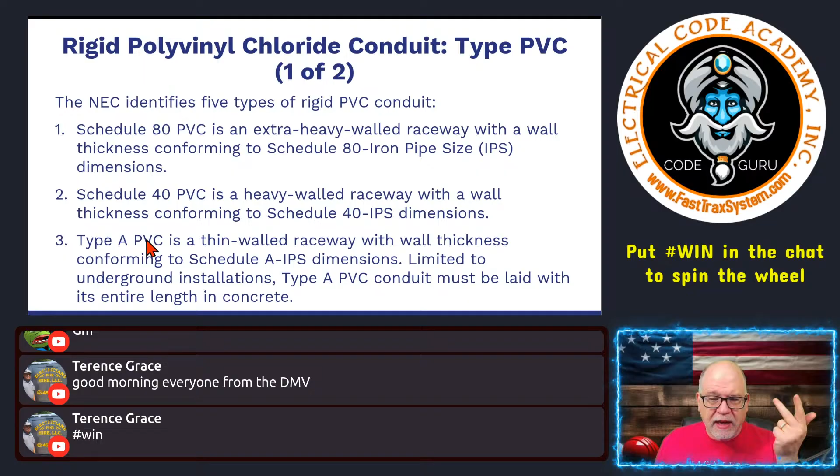So again, this recap. You have a schedule 80, more robust in areas where you're worried about damage. You have a schedule 40, probably the workhorse you use most all the time when you're using PVC. Then you have a type A, which is a thin-walled version that's really designed to go into the ground and encase in concrete. Then you have what's called type EB PVC.

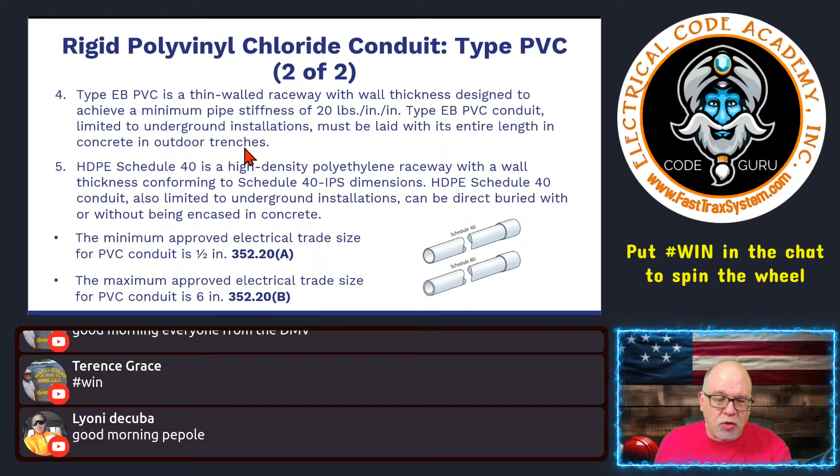That's a thin-walled raceway with a wall thickness designed to achieve a minimum pipe stiffness of 20 pounds. Type EB PVC conduit is limited to underground installations, must be laid with its entire length in concrete in outdoor trenches. Okay.

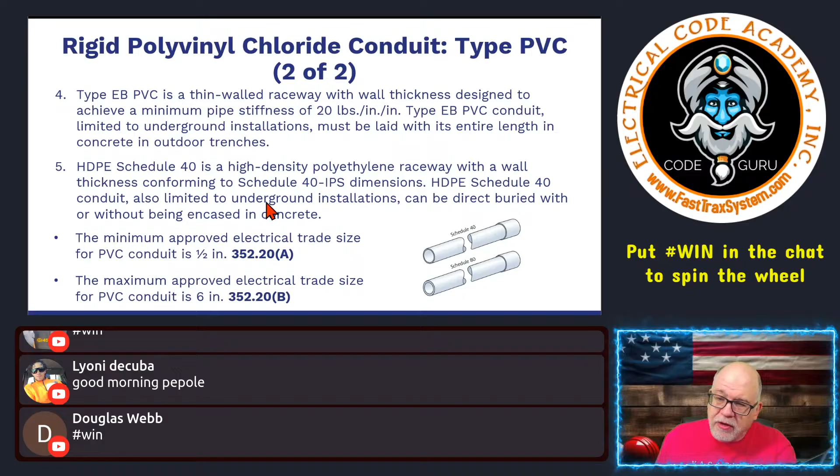Also, lastly, there is an HDPE high density polyethylene Schedule 40. It's a high density polyethylene raceway with a wall thickness conforming to Schedule 40 dimensions. HDPE Schedule 40 conduit, also limited to underground installations, can be direct buried with or without being encased in concrete. So HDPE is some tough stuff.

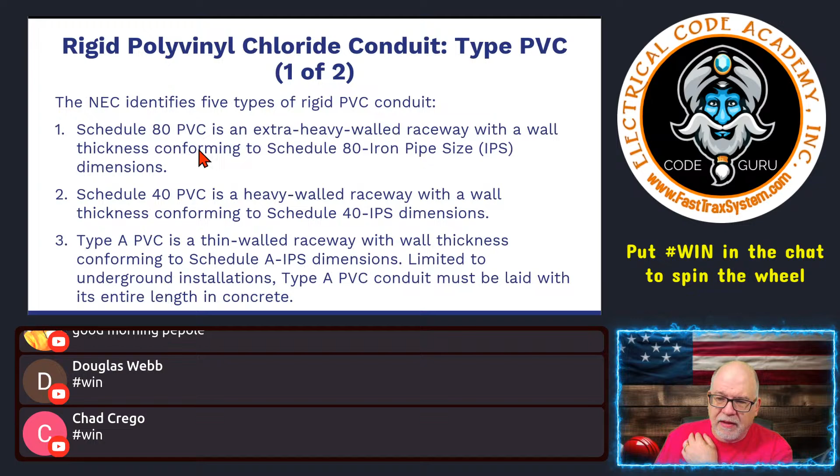So it's still Schedule 40 thicknesses, meets all those rules, IPS dimensions, but it can be installed with or without concrete encasement. But it is limited to underground applications, and it is HDPE. So above ground and below ground, Schedule 40, Schedule 80. The other types that are available, for below grade underground applications, EB has got to be encased in concrete, and so does Type A. Its entire length encased in concrete, but it can be underground.

And then, of course, you have HDPE, high density polyethylene type. And again, don't get confused and buy that when the supply house says, hey, all I've got is some HDPE Schedule 40, it's okay. No. It's limited to underground installations and direct burial, but you don't have to encase it. Right. That type of thing.

All right. Now, as far as the National Electrical Code, when it comes to the sizes of this stuff that's available on the market, we have seen a change, and I'll show you. But the minimum size that you're going to find for this is a half trade size. We call it half inch, but it's actually half trade size. And then the largest type of PVC that you're going to find is going to be trade size 6. Okay. And if you look at it, I'm going to show you.

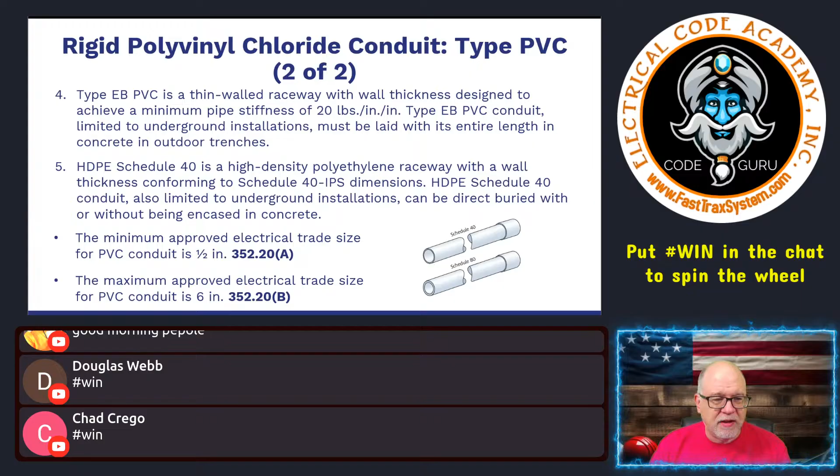Hold on here. Let me go over here in the code real quick. Let's see. That might have been last code cycle. I don't see anything else in there. So we'll just stick here. So it's as small as a half, as large as 6. And I would think the majority of the 6 size of PVC is probably where people would use it, running it out underground for various duct bank applications and things like that. Obviously, I'd rather run PVC than anything else, I'm just saying, in that scenario. Okay.

All right, securing PVC rigid. So, okay, you kind of look at here. This might be hard to see, okay? And we'll go look at the securing in .30. It's another tip for everybody when it comes to securing and supporting applications. Remember, in most of the wiring methods, .30 is the go-to location when it comes to securing and supporting applications, right? And obviously, something that's secured is considered supported.

So, thinking about where do I go to find this, especially if you're on an exam and you get an exam question and it seems like it's talking very specifically about the wiring method, PVC, but then something about that question pops in there about securing or supporting applications, then it shouldn't throw you. Obviously you're going to go to 352 and you could bold scan, but remember securing and supporting applications, it's the same way in 334 for nonmetallic sheathed cable, .30, same scenario. Securing requirements, same thing in rigid metal, intermediate metal, rigid, all of it.

The .30 is one of those that you don't have to remember everything about it. But if you can remember the article that you need to be in and it's a wiring method, then .30 is going to put you in the right place for securing and supporting. So if I'm on an exam, I'm not going to go whipping through the back of the index looking for securing and supporting requirements for PVC, for example. I'm going to know that it's a raceway, it's a wiring method, it's in chapter 3, it's 352, and the securing and supporting requirements are .30.

If you want to put in more securement, or you feel like it looks better, the one thing I will tell you about PVC is that, depending on the location, if it's a lot of heat or it's in the sun, you have to take expansion and contraction into play and use expansion fittings where necessary, because it can move, it can deflect. You want to make sure that the securing method allows for it to be able to move, not hold it so tight that it can't expand and contract, because it's plastic.

It heats up, expands, cools, contracts, and you got to account for that so you don't have that spaghetti along your wall, right? But any other application where you might install it inside, you're not going to have that kind of issue. But if you want to put more securements up, that's totally up to you. Don't let anybody tell you otherwise. You tell them Uncle Paul said piss off.

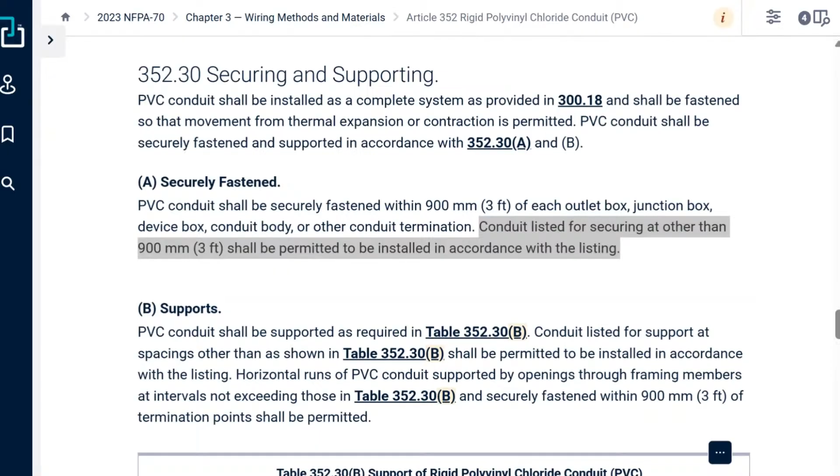Okay, and we're not talking about termination into a coupling. Okay, so it says conduits listed for securing at other than 3 feet shall be permitted if installed in accordance with the listing. So if you have a manufacturer, for example, that has their own instructions, their own guidelines, depending on what the manufacturer is, then obviously it has a listing for that, and you can follow the listing. But this is a minimum rule, right?

1 hole versus 2 hole strap doesn't matter. It's a preference. There's a lot of people that love 1 holes and a lot of people that love 2 holes. A lot of times, depending on the size of the conduit, it's going to dictate the 2. So 1 holes may be limited in certain sizes, where once you get to a certain size, it'll be 2 hole, those type of things. But again, it really doesn't matter. As long as it secures it and fastens it in place, you're good.

You're good to go. I have personally not seen a whole lot of 6-inch 1 holes, but they might be out there. I don't know. It doesn't really matter, as long as that strap is listed to go with that type of raceway. And again, if they make a 6-inch 1 hole strap for use with PVC, then obviously it's okay. You can do it. I don't guess there's a problem with that, but we'll see. We'll look more into the code.

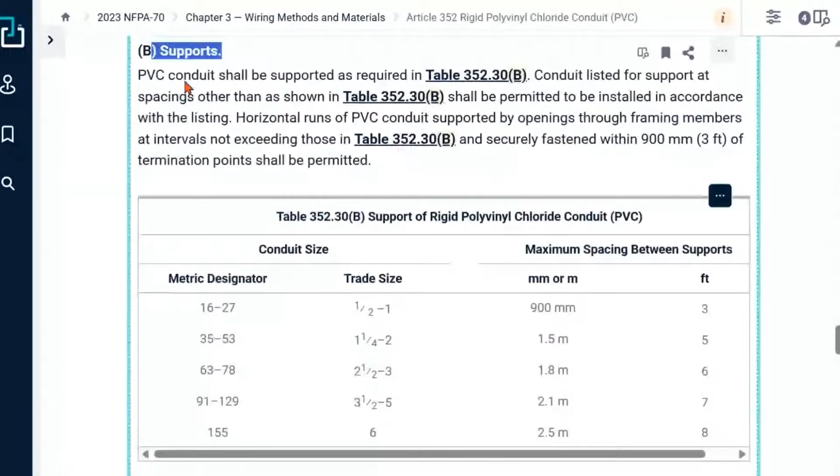All right. So that's your secure. Again, that's the general rule, right? Within 3 feet. Can it be less than 3 feet? Yeah, if you want. That's up to you, your design. Now, when it comes to supporting, this fastening is the requirement to be securely fastened within 3 feet. Then you get into supporting, okay? And the supporting, as it goes along the span of the wiring method or the raceway, will be securely fastening it in place, but it's also doing the supporting role, okay?

So it says PVC conduit shall be supported as required in table 352.30B. Okay, that's this table right here we'll look at. It says conduit listed for support at spacing other than shown in this table shall be permitted. So it's a permissive statement to not follow this table, to be installed in accordance with its listing. So again, these are general rules. You could have a manufacturer that states otherwise.

And some people say, well, what if the manufacturer says differently? Well, this is the minimum code requirement. A manufacturer could come up and say, I want you to do it at more intervals than what this is, that type of scenario, right? So remember, this is a permissive rule. It is permitted to install it in accordance with the manufacturer's listing. Okay, we just don't want to lessen the safety aspect of the code.

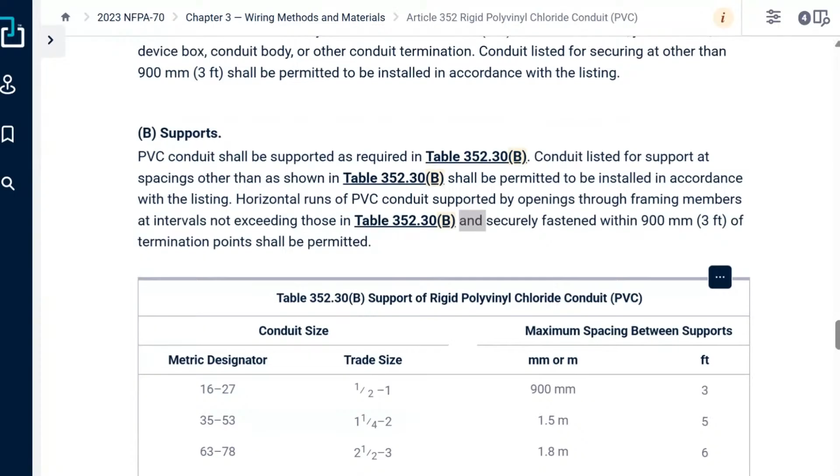If your studs are spaced, and they probably will be, 16 on center or 24 max, then as long as it's horizontally running through those framing members, and it is still securely fastened within 3 feet of the termination point, it shall be permitted. Okay, so notice this and in here. Ands are important. Why are ands important? Because in the code we run into a lot of things that say this and that, or this or that.

And so it's real important to understand what the ands are or, because you could have something that says one thing or it says something else, then you got to do this and that. Whereas if I have an or, it breaks up the requirement. In other words, it can be this, and you're like, okay, I got to do this, or I can do this. Right? So that's kind of understanding the rules of the ands and the ors, that type of thing.

So I'm okay to run it through framing members as long as the framing members don't exceed the spacing allowances in the table, and I'm still securely fastening that raceway within 3 feet of its termination point into a box, to a junction box, things like that. Okay. All right. So the general stuff when it comes to PVC applications.

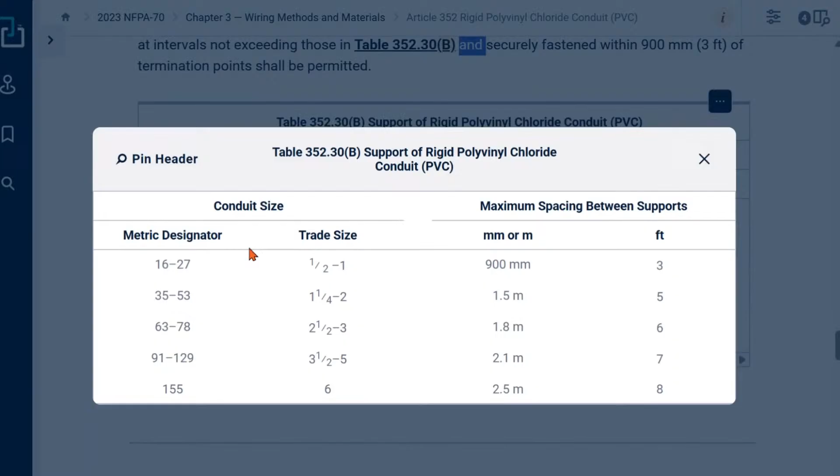So here's the table, and I'll just blow this up. I don't know how much this will show on screen. Actually, it shows all of it. Okay, good. I'll pin the header. So here you see trade size.

Now, this is a metric designator used a lot in other countries. Don't be kind of screwed up on an exam. If they give you an exam question and they give you a metric designator, then make sure you just shift your mind and do everything under the metric designator, because they're not trying to trick you. They're just trying to make sure that you understand that you can use either or. Right? But most of the time, what we see is trade size.

And again, we see half and we see one. We're so used to calling this inches, right? So we're so used to saying half inch, 1 inch, 1 1/4 inch. We're used to that, and it's okay. It works out for us. But in reality, that's really trade size. Okay, it's not so much the inch value. I mean, it works out.

So I mean, again, I'm not losing sleep over somebody going, oh, well, it's kind of like the sub panel people, right? They're like, well, there's no such thing as a sub panel. I'm like, well, we all know what the hell it is. So lighten up, Karen.

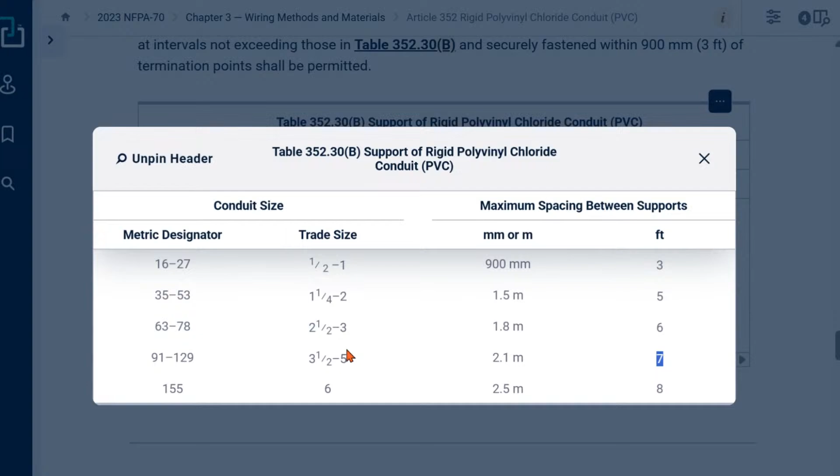So anyway, here we see half to 1. Then it needs to be maximum between the supports, in your case, the straps, or your framing members, not to exceed 3 feet. Okay. So again, maximum spacing between supports. Then you get to 1 1/4 through 2. You see it goes up to 5 feet. 2 1/2 to 3 goes to 6 feet. All right. 3 1/2 to 5, it goes 7 feet. Okay. This is a maximum spacing between supports. Then you see trade size 6, it's 8 feet. Okay. That's what we got in this application here.

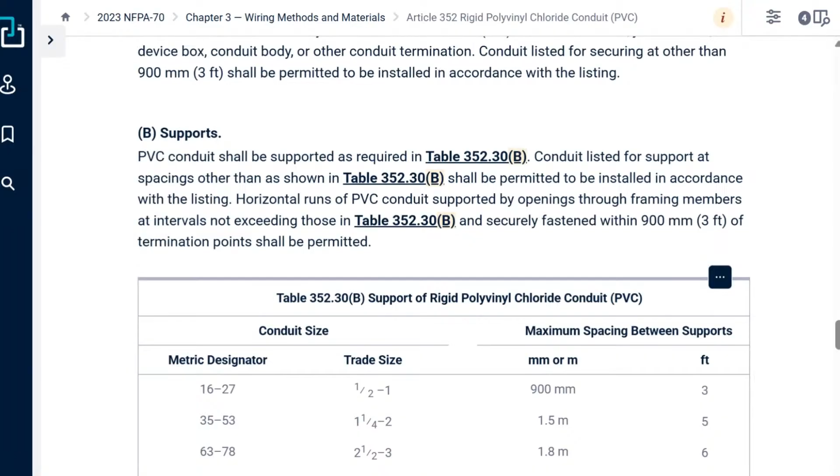You have to remember that there's a little old pesky thing in the code called listing, right? So there's also a big argument right now whether or not strapping and straps are listed, and we see a lot of this changing. 352.6 actually says PVC conduit, factory elbows, and associated fittings shall be listed, and the argument is whether or not these straps are considered fittings or not.

I can tell you right now, when you buy a strap for use with PVC, ain't nobody going to critique it. The only problem you're going to run into is when you try to do something stupid, like use nails. And yeah, you could say nobody would ever do that. I got pictures of that. People do stupid things to support stuff. So yeah, as long as you don't do anything stupid, then you're going to be okay.

All right. Let's see here. Okay, so there you go. So PVC must be fastened so that the movement from thermal expansion or contraction is permitted at 352.30. So again, there's going to be, depending on the temperature, your ambient temperature, then what the hottest it can be. Typically you can get this information from your weather society, or from different places like, I think, Copper Development has a document, ASHRAE has a document. They can show you different temperatures.

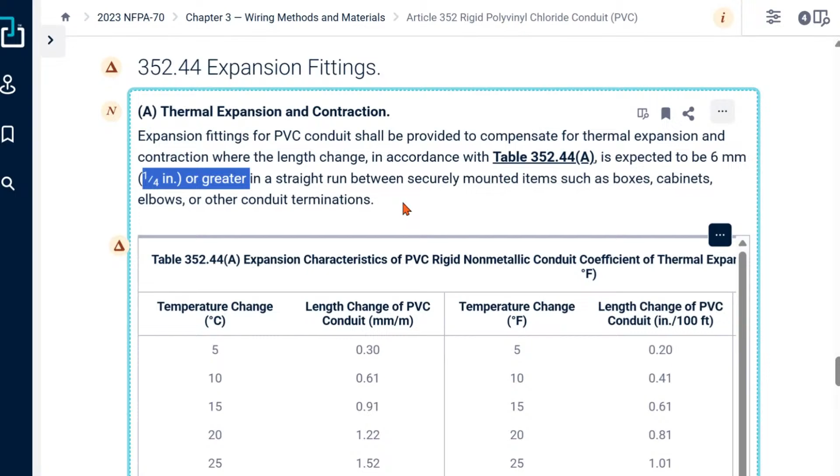It says expansion fittings for PVC conduit shall be provided. Okay, so it's not an option, right? It shall be provided to compensate for thermal expansion and contraction where the length change in accordance with Table 352.44(A) is expected to be a quarter of an inch or greater in a straight run between securely mounted items such as boxes, cabinets, elbows, or other conduit terminations. So it's between your elbows, for example.

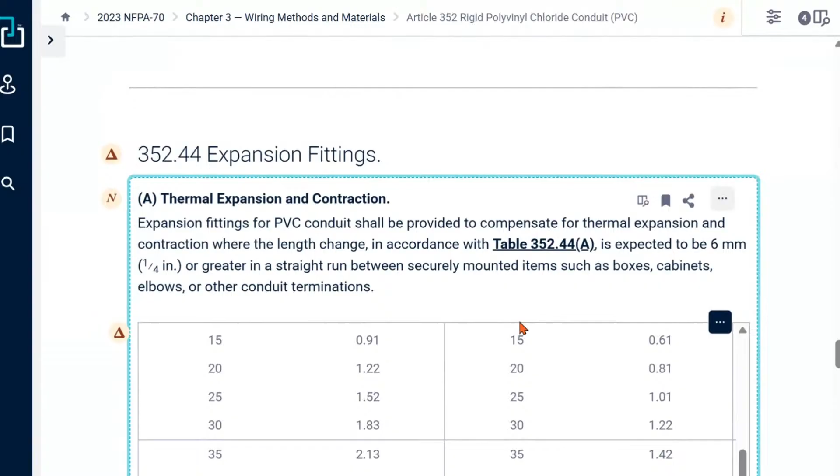Here's an example, but here's your table, by the way, if you're not familiar with how to do this and you're on the side of a building. I don't know if this whole table will show up. So here you see kind of the formula that works this whole thing out. And here you're looking for the length of change in PVC conduit. You'll see the different changes in length depending on the temperature change, right? And you'll see that over here it's in Celsius, and here you see Fahrenheit.

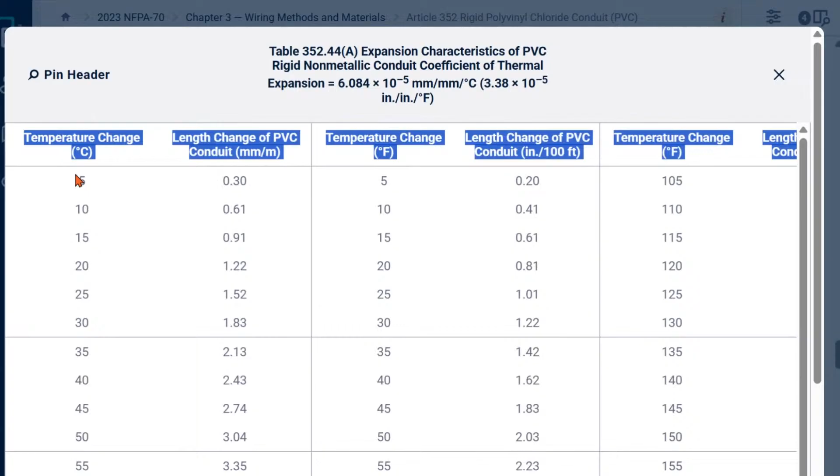So all of these over here in Fahrenheit, which is what we typically will run into, and then of course you've got Celsius down here. And you'll see this goes down to 100 degrees Celsius, and over here in Fahrenheit. It goes all the way down. Now, one of the big things to remember here is this is your millimeters. We don't typically tend to use this that often. We're over here, doing temperature change.

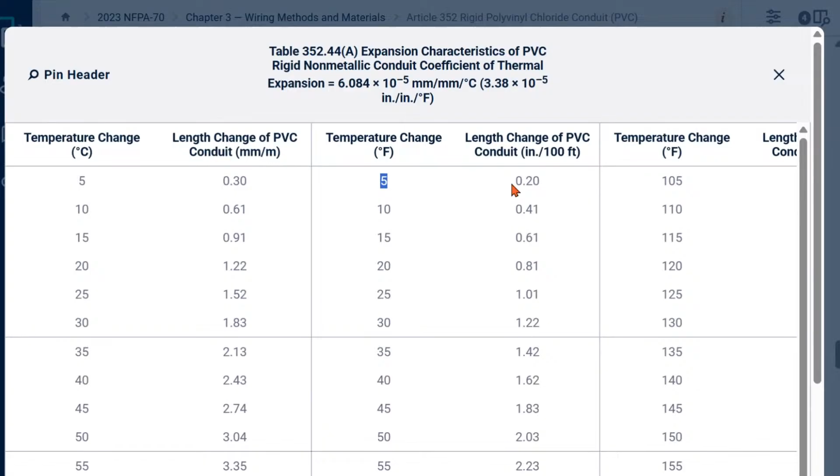And what we see is you have the length, and this is inches per 100 feet. So a 5-degree temperature change will result in 0.20 inches of movement in 100 feet. So that's what you see there. So this is where you're going to get the table depending on what your temperature change is.

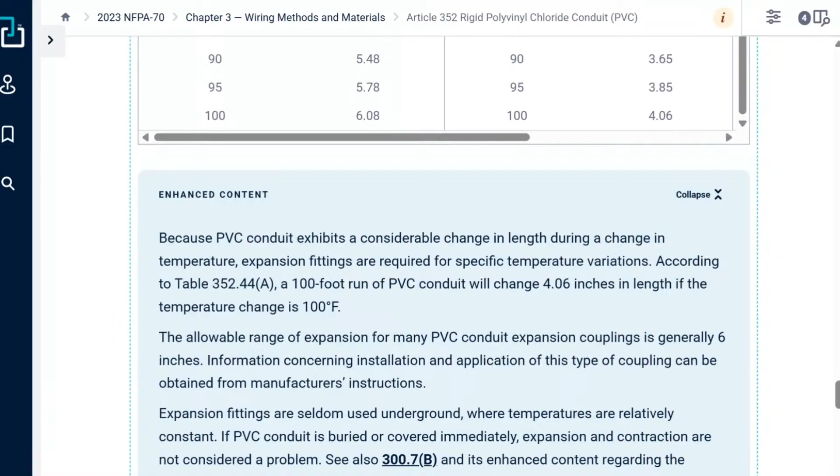Now, the one good thing about the code is here, and many people don't realize it's here, is this informative commentary, right? And if you have LiNK, the commentary is available to you. It's probably the same example that's in the handbook. But this just gives you an example. Because PVC exhibits a considerable change in length during a change in temperature. Obviously it does, it expands and contracts. And expansion fittings are required for specific temperature variations.

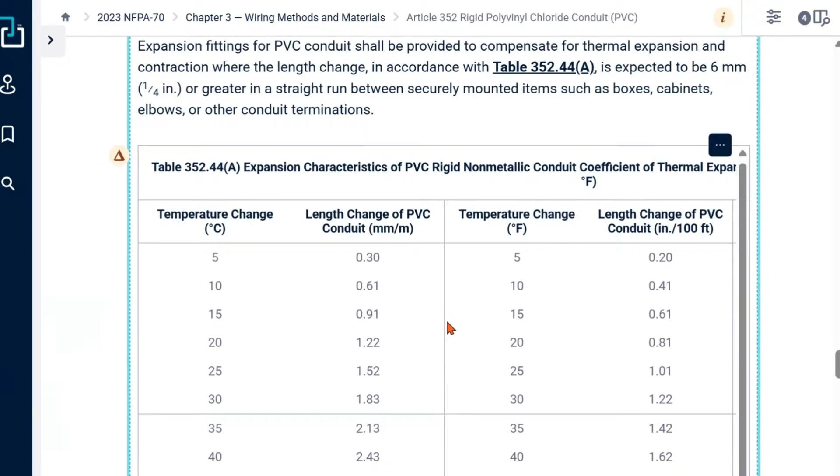According to Table 352.44(A), a 100-foot run of PVC conduit will change 4.06 inches in length if the temperature change is 100 degrees Fahrenheit. So if your temperature from the lowest to the hottest can swing 100 degrees, depending on the time of year, you've got a swing of 4.06 inches per 100 feet.

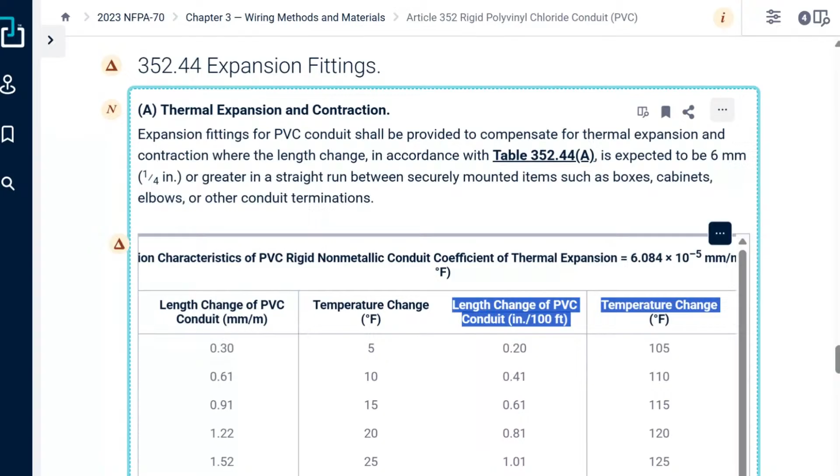So it adds up. It's a little movement along the way, and it all adds up cumulatively. For every 100 feet, you're going to have about 4.06 inches at a 100-degree temperature change. Now, the allowable range of expansion for many PVC conduit expansion couplings is generally 6 inches. Information concerning installation and application of this type of coupling can be obtained from the manufacturer.

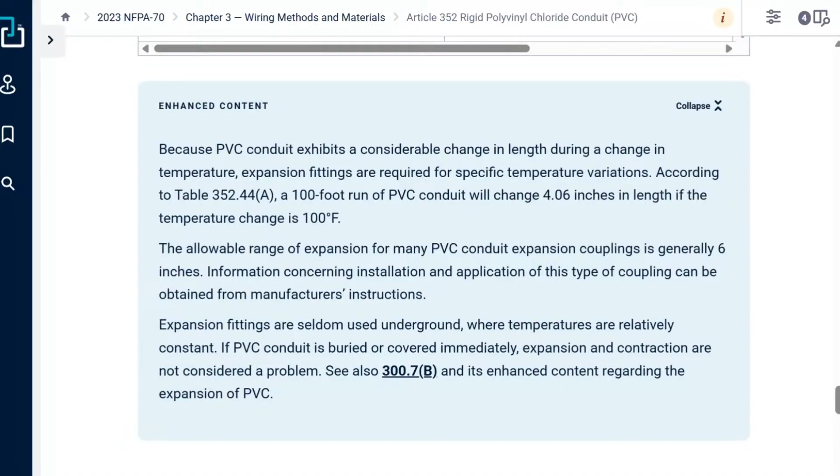It's really simple. You have to know what your temperature swings are. And if you know your temperatures, you can get what your average low is and what your average high is for your area, and you can make the adjustment. But when you buy these fittings, they're adjustable.

And so you're going to make sure that whatever ambient temperature you're at, how it sits in the swing between the 4 inches at 100, you have to look and see how it is in the swing and adjust your coupling for that so that it does have this allowance to move based on the temperature that you're at right now.

All these instructions, by the way, for people that say, God, I got to know how to do this, the instructions actually come with the actual expansion fitting. Whether people stop and read it, it's two different things, right? But it does indeed come with the instructions. Or you can go to the manufacturer's website and you can get that information on how to adjust these.

But again, the temperature at the time that you're installing it is going to be different than the lowest temperature you could experience and the highest temperature that you could experience. And what you're looking at is that drastic change in temperature seasonally. Most people, I think, probably don't take those things into consideration, but you're supposed to.

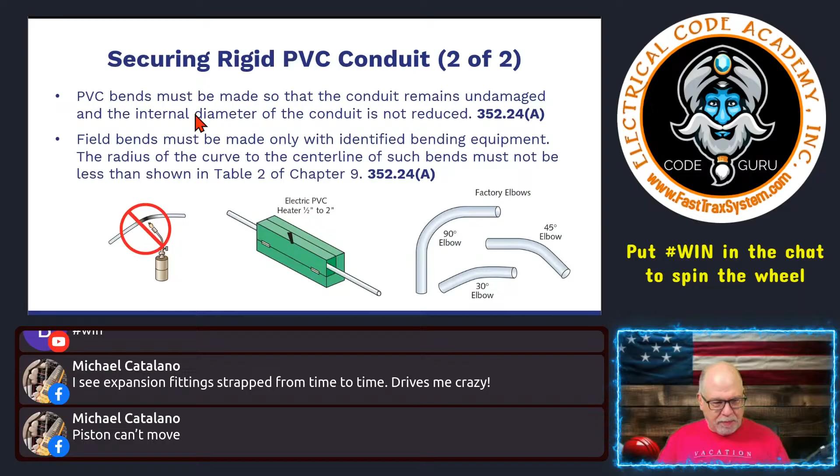Bending PVC. Now, this is one that I get people that yell at me all the time. They say, Paul, you do what you got to do, and I get it, okay? What is it? Battles says, only have good luck using PVC straps to keep movement. Yeah, PVC straps with PVC, because they expand and contract about the same. It's still PVC material, and it allows the heat that builds up in the strap. It also does the same thing with the wiring methods. So they work together. It's my best advice, but again, people want to use metal.

That's fine. Metal expands and contracts at a different rate than a PVC material would, obviously. So again, you have to make sure you're using a strap that is for that wiring method, and you're not just picking up, let's say, a rigid metal strap and using it on PVC. You get what I'm saying?

Jason says, I've seen the expansion actually bust through the side of the non-metallic box. Yeah, because they sized it all wrong, right? And it just busts right through it because it didn't take into account that expansion and contraction. Yep. And electricians say, well, I'll be replacing that soon, that type of thing. So yeah, this is why we get the big bucks, so that you learn how to do those things. But again, rely on the manufacturer, because they give you instructions for those things. Follow what they say when it comes to mounting and installing those things.

All right, next, securing. Now, PVC bends must be made so that the conduit remains undamaged and the internal diameter of the conduit is not reduced. Okay, so that's 352.24(A). So you see this picture here on the left, which again, I was going to do a poll. A poll said hands up for everybody that does this. But the reality is you're not supposed to bend these PVC conduits with a blowtorch. I get it. Or a heat gun. Now, heat gun a little bit better because it's a little more controlled heat, and definitely not a blowtorch.

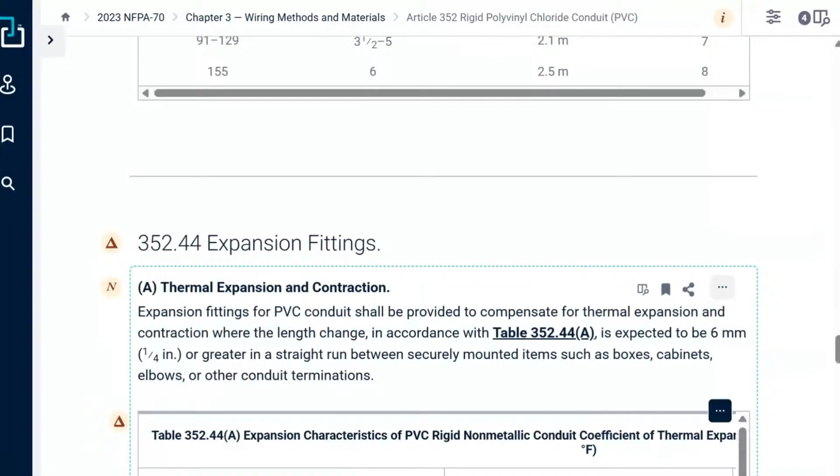We'll go look at the code real quick. We'll kind of scroll back to 24(A) so you can see this. Ooh, where am I at? Sorry, I went too far. There we go. Bends, right? So bends shall be made so that the conduit will not be damaged and the internal diameter of the conduit will not be effectively reduced.

I mean, it's still the same diameter, right? But if you bend it improperly and it kind of footballs out a little bit, then you've effectively reduced that diameter, okay? Now, diameter is measuring across, right? So we have circumference, we have diameter, and we have radius. So if you bend it and it squishes down and you say, well, it still has the same amount of area. Well, it says right here it doesn't damage the internal diameter. So this way the diameter may increase, but up and down where it squishes down, the diameter is decreasing. Doesn't matter which way you want to measure it, it's effectively decreasing diameter.

So when an inspector looks at how you bend it, if I see scorch marks and I see that it's kind of elongated out, that's a problem. Now, you might say, well, Paul, relax. It's just 2-12s and maybe 3-12s and equipment ground. You're thinking, Paul, come on, it's not going to hurt anything. I mean, code is code. Okay, code is code. Now, they make heat boxes that allow you to bend it without damaging, without scorching it, that type of thing. So when we say, can I use a blowtorch or not, whether you're effectively good at it or not, I get it, I'm not going to be your Karen today.

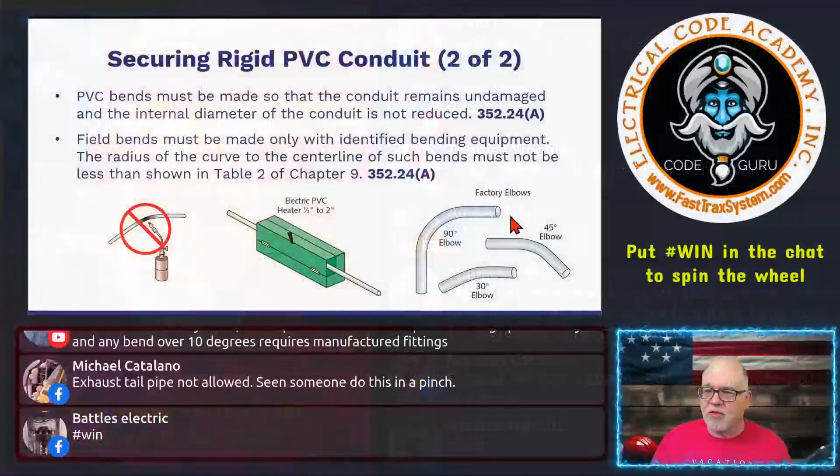Now, as always, we have a requirement. I would say typically the easiest thing to do is just use factory stuff. It's already there. But if you're in a pinch, you got to do what you got to do. I'm not here to judge nobody.

Now, when it comes to field bends, they must be made, again, with the identified bending equipment. The radius of the curve to the center line of such bends — so this is the center line of a bend right here — must not be less than shown in Table 2 of Chapter 9. This is to make sure that the bend, from the beginning of the bend to the end of the bend, is not too tight.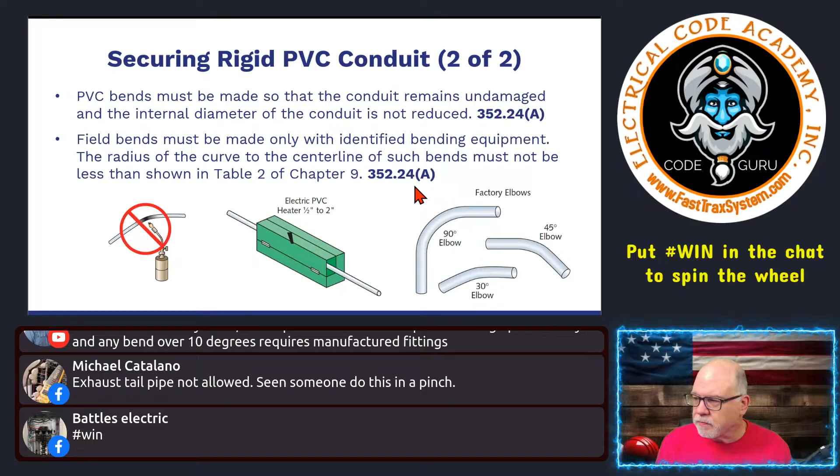So this table will tell you what the bending radius is, and you have to maintain that or be more gradual. If you exceed what's in this table, the bend is going to be too tight, and it's going to cause it to kink up. So if you want to bend it in the field, that's fine. Just none of the bends can be tighter than what's given in Table 2, Chapter 9. If you ever wanted to know what Table 2, Chapter 9 is used for, this is an example. Not going to be an issue if you pre-buy these things.

All right, discuss the different methods of providing bending. Well, we have benders. When it comes to PVC, you're going to buy pre-made elbows and offsets and all that type of stuff. You can use heat boxes. I encourage you to stay away. Now, I'm not saying I'm doing this, but if you are using a heat gun to do something, right?

If you are doing that, just make sure you slow down and you stay far enough away. It's going to take you longer, but do not discolor the raceway. Do not leave any scorching marks. Don't get too close. Don't be in a hurry. And I'm not saying you can't buy a heat gun that somebody has identified as part of a bending process. I'm saying be careful, because if you scorch it, damage it, or collapse it, somebody's not going to approve it. And who wants to redo that shit all over again?

Michael said, do they make couplers that seat deeper than the standard one? I can't answer that. I've never seen a deep coupling. I've always seen that it's all standardized when they make the fitting. They may. You'd have to reach out to the manufacturer, Cantex, a couple of those companies. But chances are, if you've been running wire for a while and you've never seen one, they probably don't make one. Or they'd probably ask, why do you need one?

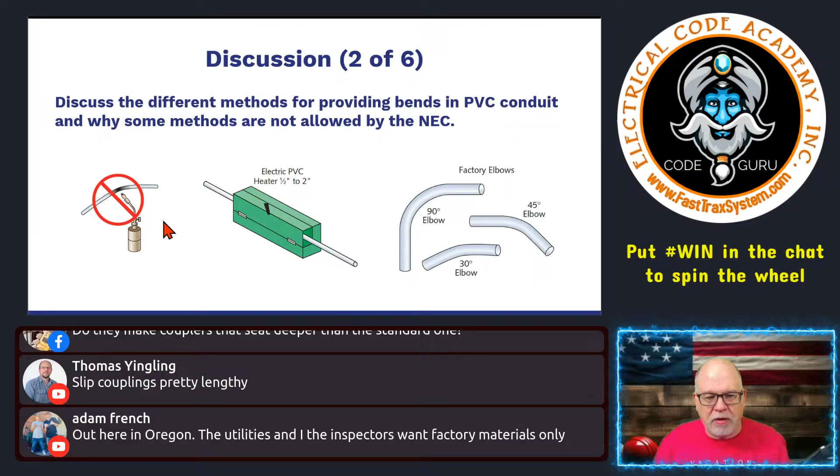Discuss the different methods of providing bends in PVC and why some methods are not allowed. Again, blowtorch not allowed. Heat gun, controlled distance, in a pinch, as long as you don't scorch it or damage it. I mean, nobody's over your shoulder, but I would recommend you not use a blowtorch, because the moment you scorch it, the inspector has every grounds to say, no, thank you. Heat boxes, they make them in various sizes, that type of thing. And of course, factory elbows.

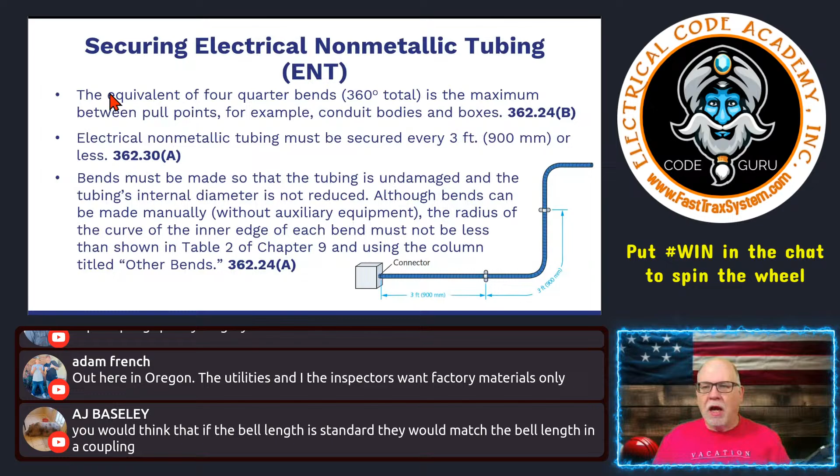Securing, oh, that's ENT. So we're out of PVC. Good, perfect timing. Just a few minutes over. So that's good. So tomorrow we will get into another wiring method and talk about it. Probably ENT. We'll talk about ENT.

Let's see. One last thing I'll touch on. As you all know, the number of bends in one run. Again, you all know the number of bends in the conduit shall not exceed 360 degrees between pull points, right? So junction box to junction box. Those are considered pull points as well, if you can access it and you're going to be pulling conductors in it, okay? So don't exceed 360. So again, you're not going to have more than four 90s.

But remember, when you're doing 360 between pull points and don't exceed it, the 90s add up, the offsets add up, all those types of things. Change in elevation where you bend it and put an angle on it. All those degrees add up, so that you're not more than 360 between pull points. Okay. So keep that in mind.

And by the way, if you're using larger PVC and you're going to exceed the 360, and you have a designer that says, look, we're going to be exceeding 360, let's just put a box in there so we can meet this rule. You can't just throw a box in there. If you throw a box in there, then it could conceivably be used as a pull point, right? And then you're going to have to follow the pull rules in 314.28, and that's 6 times or 8 times, depending on whether you're doing angles or straight pulls.

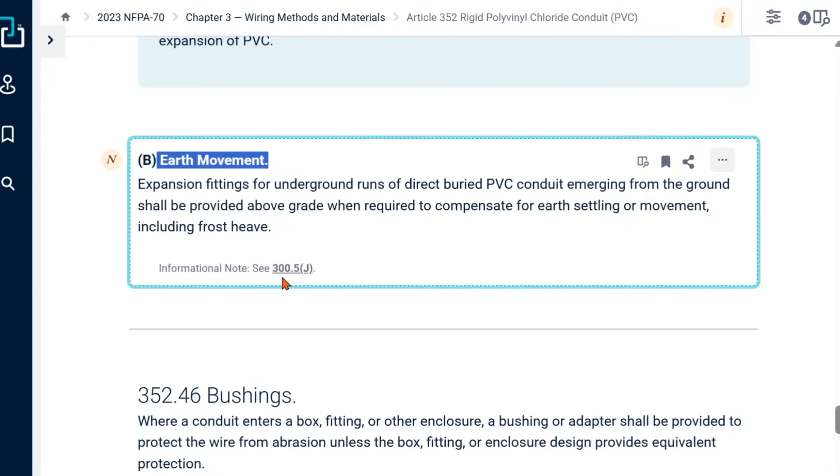Also, since we're still on PVC, we want to cover earth movement. So this is new right here. Not new, but new in the sense that it was relocated here, okay? And it also refers you to 300.5, because that is for underground installations, direct burial depths and all that stuff. It says, expansion fittings for underground runs for direct burial PVC conduit emerging from grade shall be provided above grade when required to compensate for earth settling and movement, including frost heave.

Okay. So again, when you've got direct burial conduits going underground and they emerge from the ground, these expansion fittings shall be provided above grade when required to compensate for any earth settling or movement, including frost heave. So this is not just back in 300. This is here now also in 352.

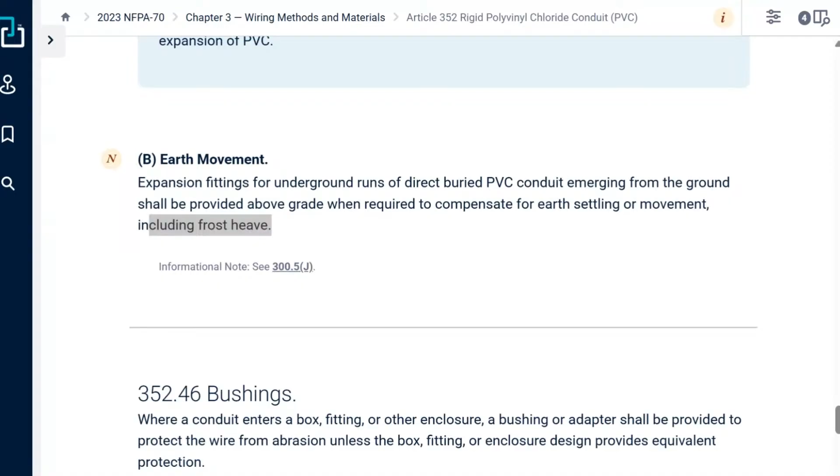So having an expansion fitting where it comes out of the ground, if there's expected earth movement, your jurisdiction will know that. You'll get used to that with your AHJs. It's not just for the service. This is in 352. This is not just when you're thinking, oh, only for when it comes out of the ground to a service. Still germane, but you see that it's been added here in the 2023 edition of the NEC.

Okay, so if there's expected movement, you're in an area where there is a lot of heave, then any of those PVC raceways coming out of the earth are going to have an expansion fitting on it to compensate for that movement. Now, is your AHJ going to be the one that calls this out and says, "Oh, we have frost heave here"? Different areas of the country. Obviously, there's not an issue with frost heave down in Florida, right?

But if you're running on the side of the building and you're coming out of the ground, you still got the expansion and contraction you got to worry about. So two different things, but they kind of work together. This rule is specifically for anywhere you have known earth movement, or you know you have frost heave, where you're going to have movement in any PVC that comes out of the ground; somewhere in there you're going to be putting on an expansion fitting.

A lot of people would say this is just to make more money for the expansion fitting, folks, but I have seen tons of pictures, not related to service applications only, where you see them coming up for the meter. I've seen this on feeders to other buildings where it literally has pulled the KOs out of the box that it connects into. It just simply pulls it out because of the heave, or pushes it up into the box.